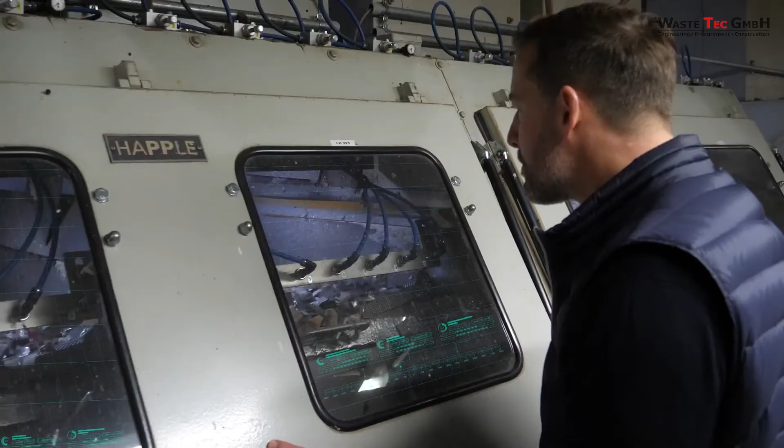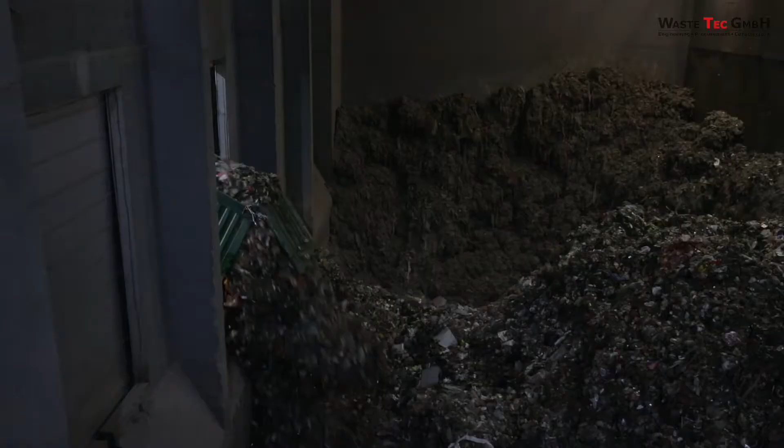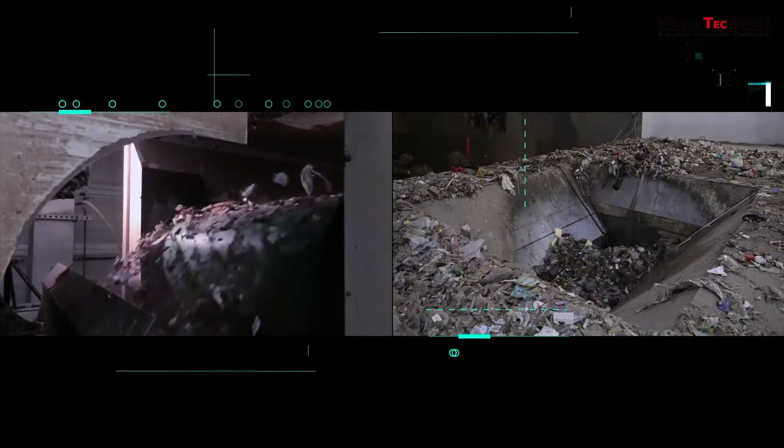Here, in this mechanical biological waste treatment plant, over 100,000 tons of household waste are processed every year. The waste treatment process begins with the rough shredding of household waste. This is followed by biological drying, which reduces the total mass by 30%. After the separation of metallic and non-combustible components, a valuable alternative fuel consisting of plastics, wood, paper, and dried organics remains, weighing just half of the initial household waste.

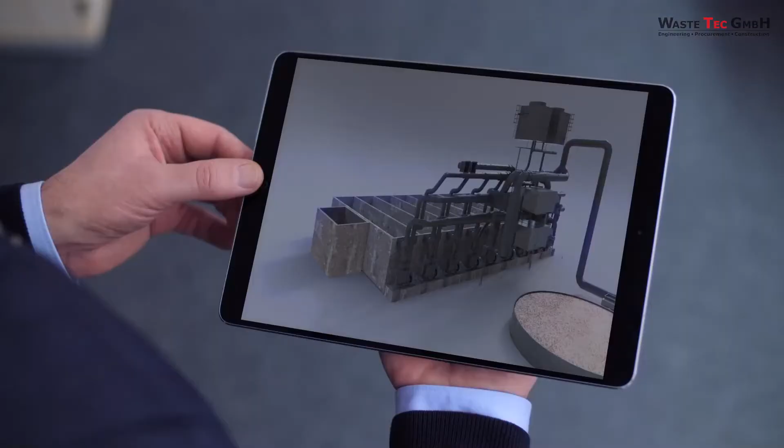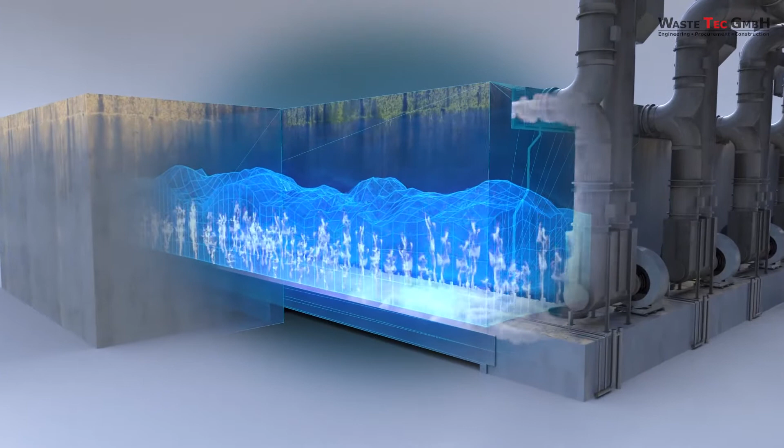Inside the drying tunnel, microbial heat is generated by ambient or circulating air being blown in from beneath the waste mass. Easily degradable organic substances are broken down microbiologically, thus heating up the waste. Water is absorbed by the heated air and discharged with the exhaust air in the form of vapor.

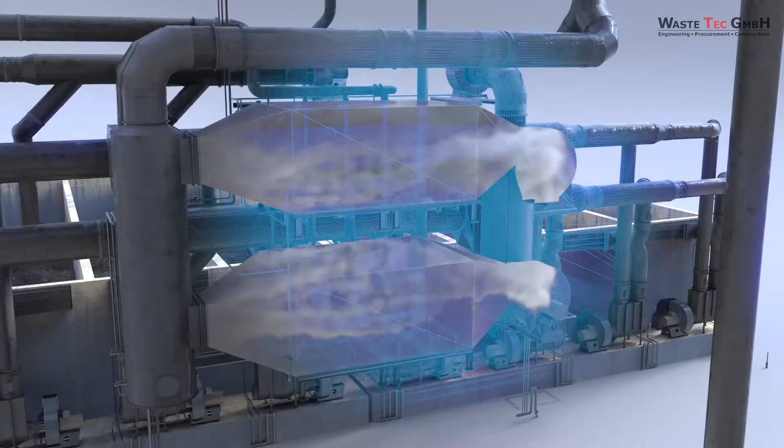The air extracted from the tunnels is released from the vaporized water and can thus be reused in the circuit. The separated air is cleaned in a downstream exhaust air treatment system. The dried waste is divided into individual fractions over several screening stages during the mechanical processing stage. After this, ferrous and non-ferrous metals are segregated before so-called air classifiers are used to sort out non-combustible heavy materials.

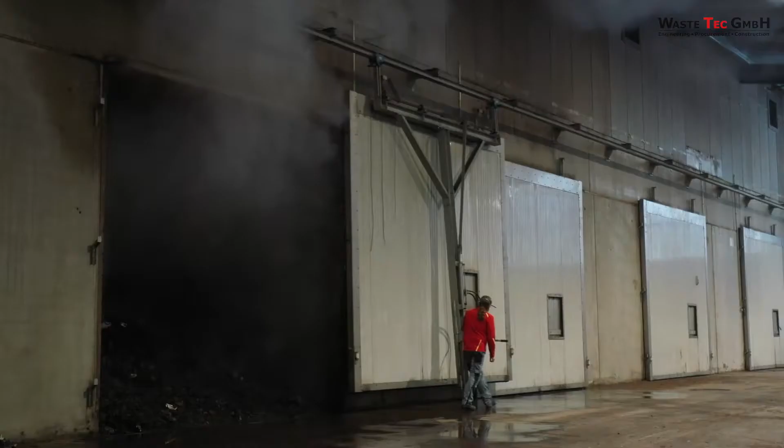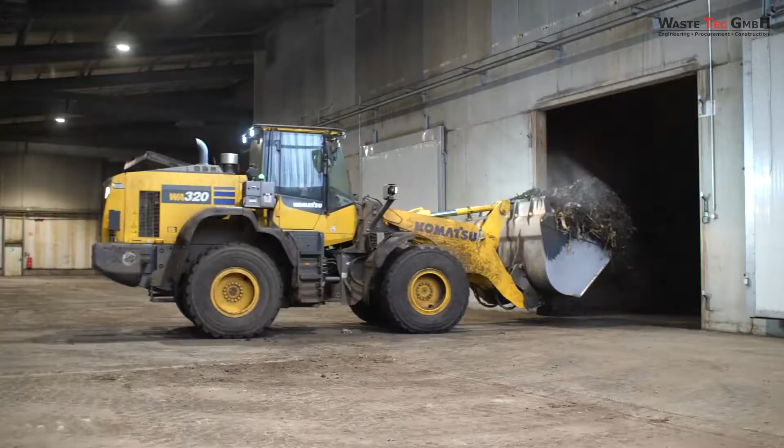Organic substances such as kitchen or garden waste, both generated in private households and commercial enterprises, are collected and processed in specially designed composting plants. The composting process is similar to the biological drying of household waste. However, the waste is not dried in closed tunnels, but is degraded over a longer period of time so that it can be used as compost.

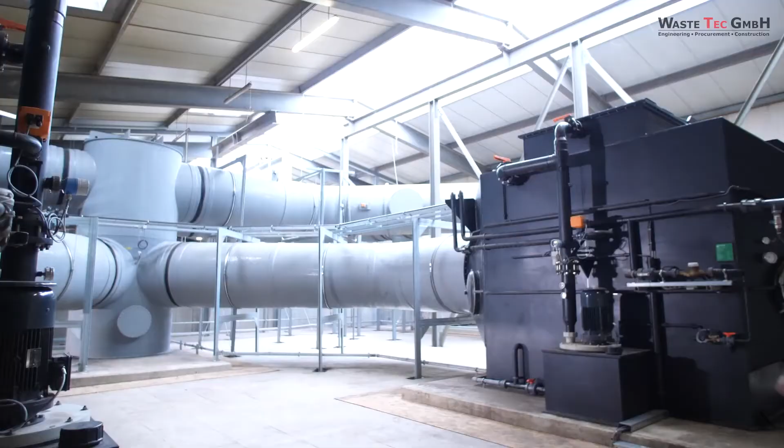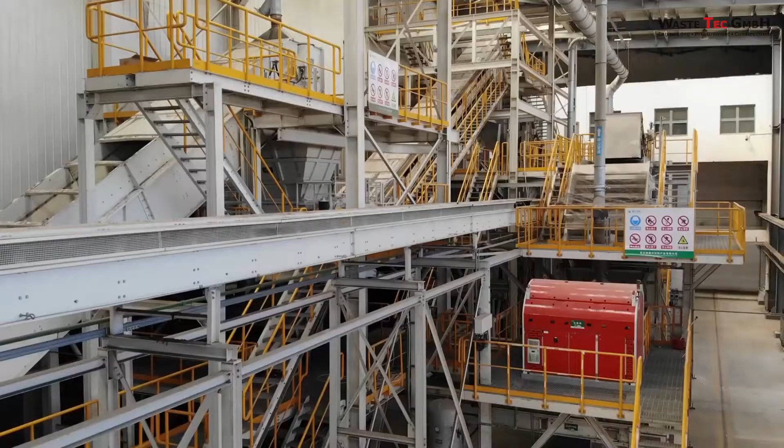After screening out impurities such as plastics and stones, the result is a high-quality compost for private use, landscaping, and gardening. And it is also used in agriculture as a soil improver or fertilizer. Composting serves to protect our environment, as compost can be used instead of chemical fertilizers almost everywhere. To date, more than 50 of these plants have been planned and built on the Waste Tec concept.

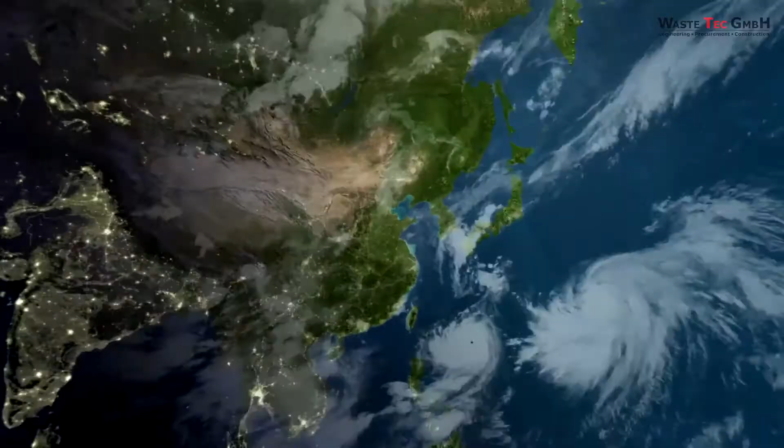For many years, Waste Tec has been developing and selling plants like this to the People's Republic, an active contribution to helping the country achieve its ambitious environmental, climate, and recycling targets.

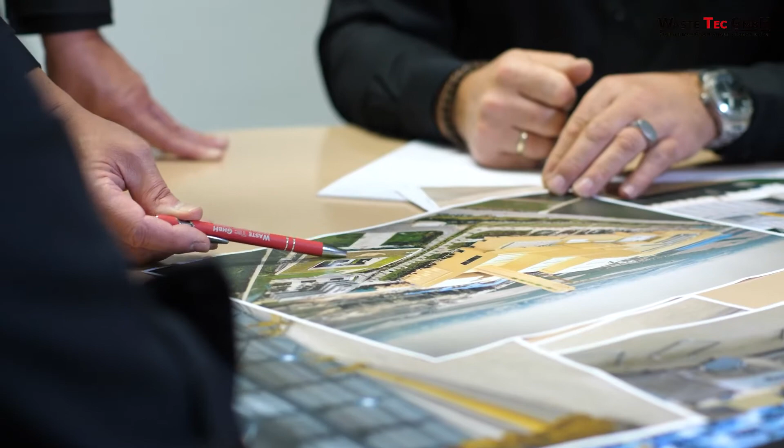For many years, Waste Tec has been one of the first addresses when it comes to the development and construction of sophisticated waste recovery solutions. More than 20 specialists from the fields of planning, process development, construction planning, electrical, and control engineering work hand in hand to create customized solutions for modern waste recycling plants all over the world.

We build the future. Waste Tec.